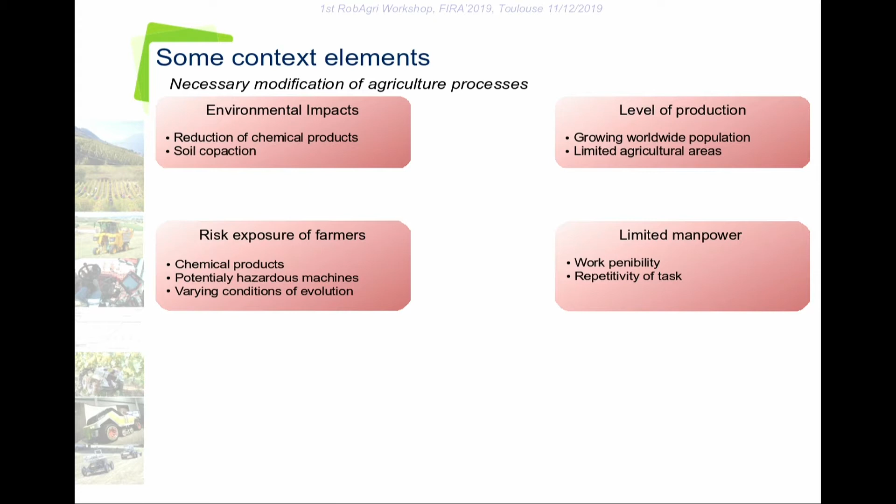So nowadays we have talked a lot in this FIRA, International Forum of Robotic Agriculture, about the benefits of robotics to face problems with respect to the evolution of agriculture, the environmental impact, the preservation of the level of production, the risk exposure of farmers, and the fact that we have a lot of penibility in achieving agricultural works. Robotics can help in having new principles for agriculture, such as precision agriculture, agroecology, or biological agriculture, since each of these solutions requires more manpower and more accuracy.

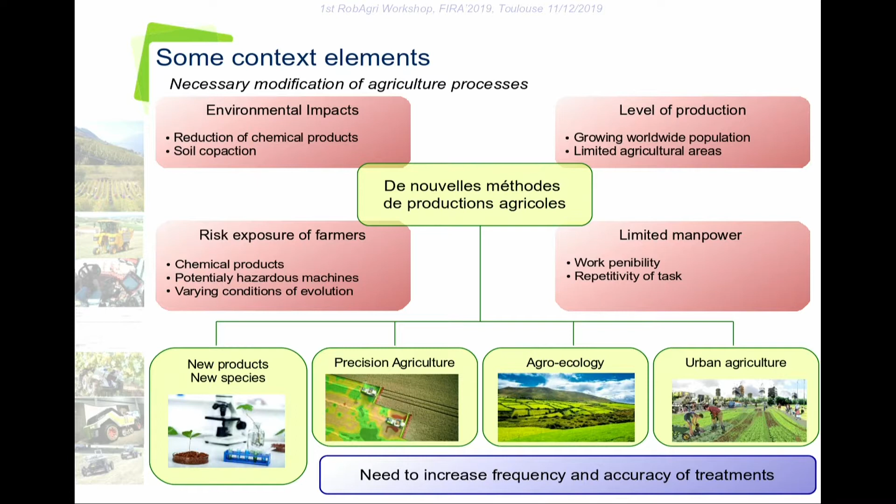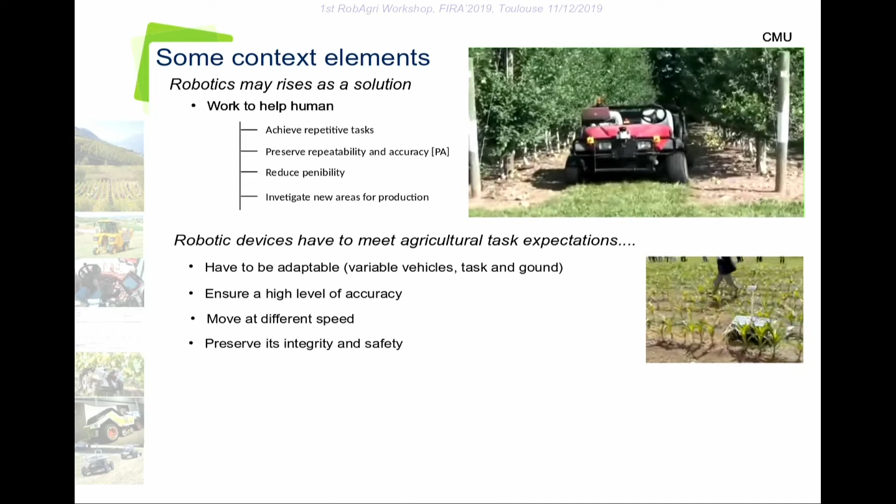But robots are here to help humans in working in agriculture, but they can also be used to find new concepts for agriculture. So instead of having big machines, we can have small robots who have the time to do a very precise job and act at the plant level.

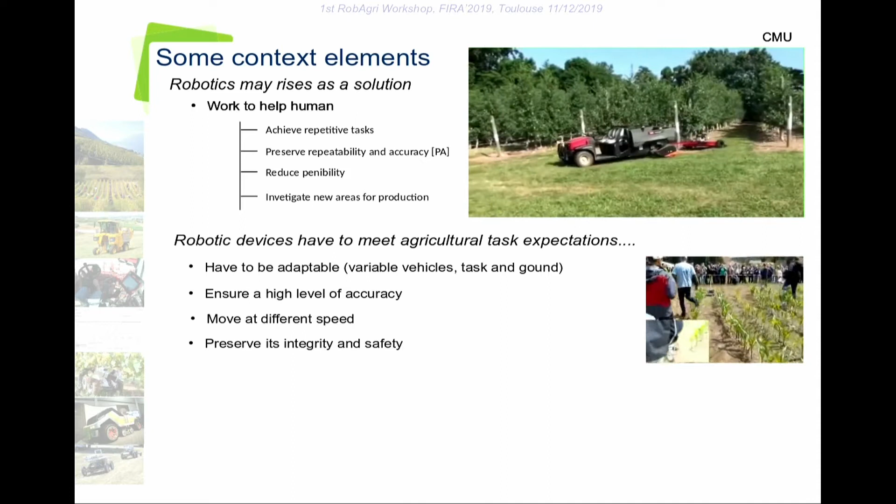Unfortunately, if we have some connection with the field of autonomous vehicles, we have some differences, because autonomous vehicles are moving into known environments. We have some structure, we have some prerequisites, we have some knowledge about the potentiality of parameters and interactions. And also the only task in transportation systems is to move from one point to another, even if we transport goods or people.

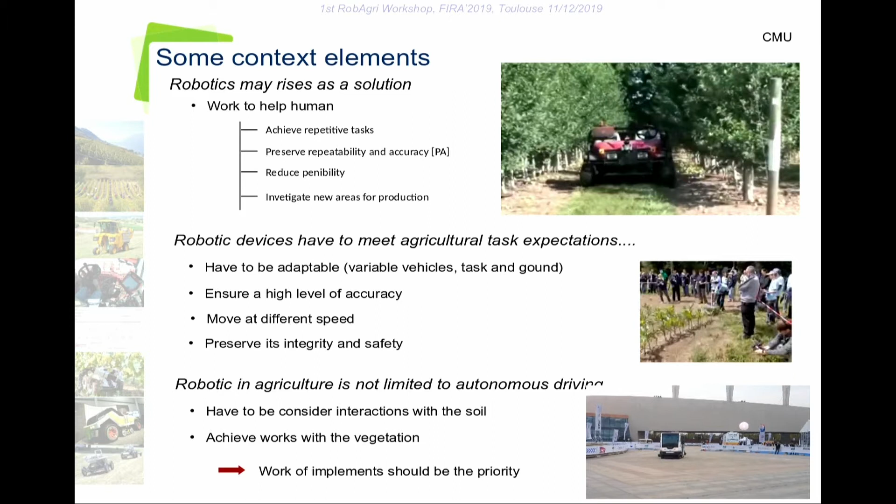But in agriculture fields, the idea is that we are making something on the earth and on the vegetation, and then we have to develop implements. What is important in agriculture is the interaction with the vegetation and with the earth. And so nowadays, what is done in such fields of application is...

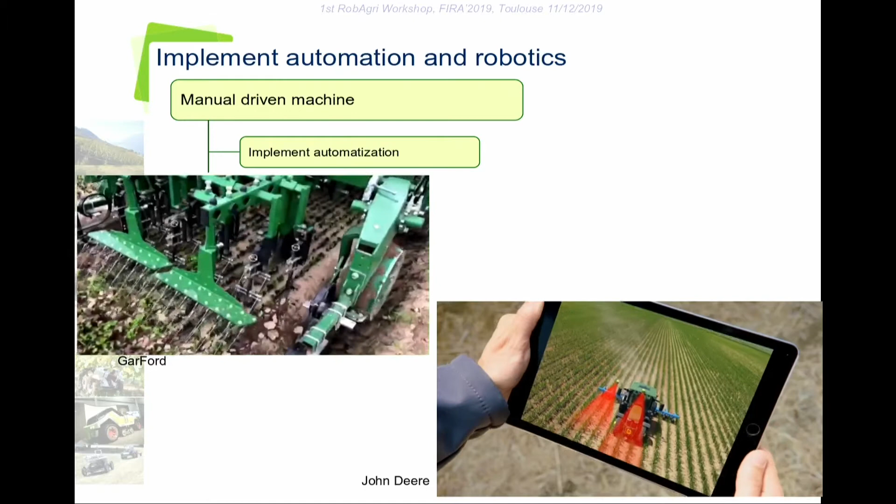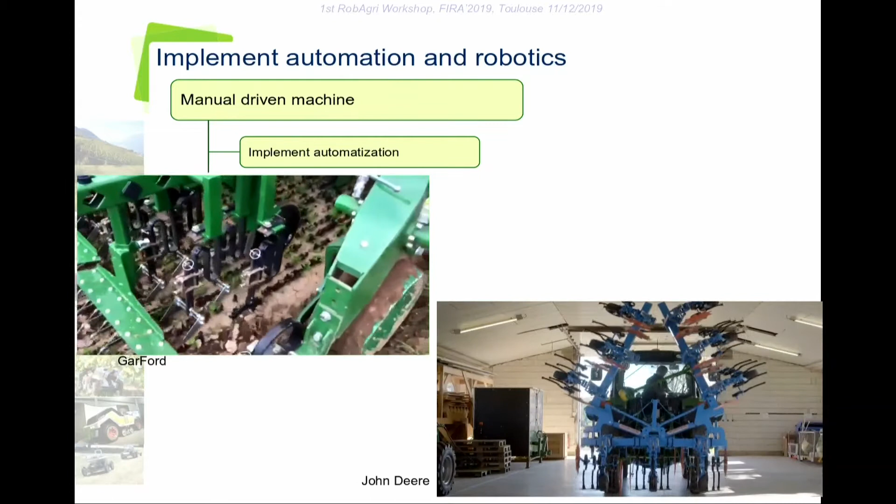First, we have activated implements, which are tools mounted on manually controlled machines, such as Garford, or some proposals from John Deere. In both cases, we have a conventional tractor which is moving thanks to the farmer or operator, and the implement adapts with respect to what the farmer is doing.

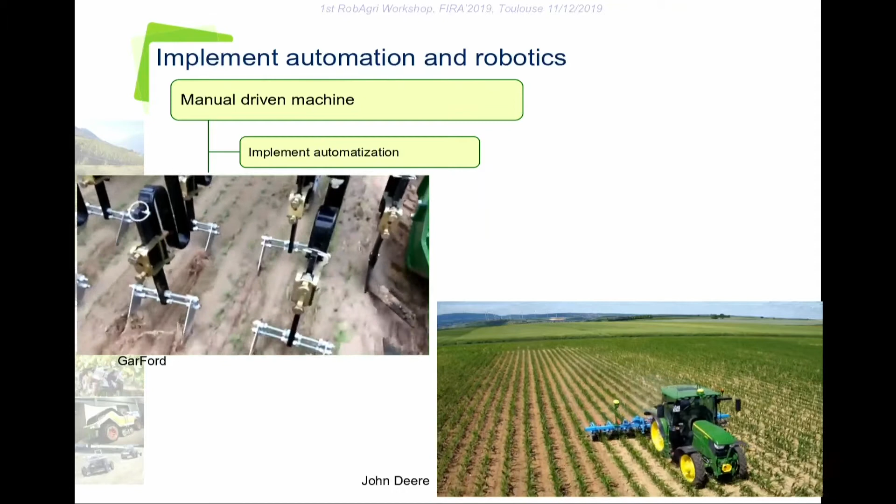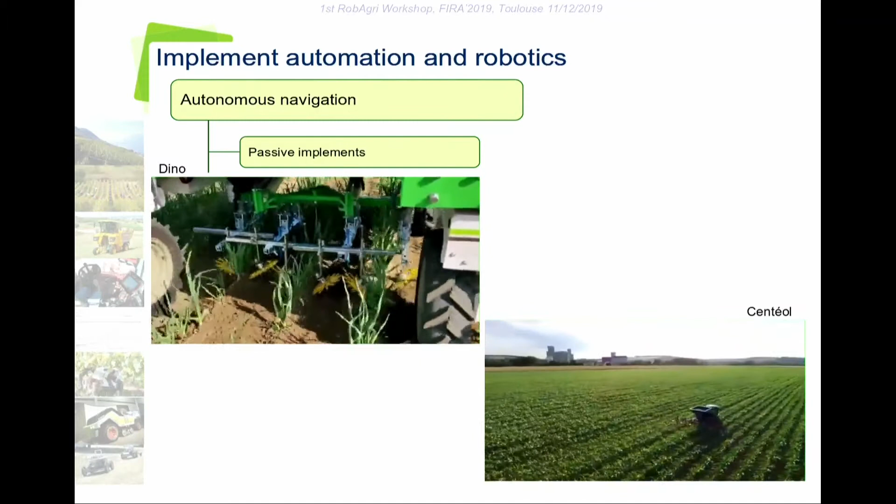The second way is we have robots, but we have passive implements. So robots can move autonomously, and it tries to position itself the best with respect to the vegetation, but the implement, the tool, is passive, so you just transport it.

We also have both active implements and active mobile platforms, autonomous mobile platforms. It's the case for Ecorobotix, which is a moving robot, and while it is moving, the implement is doing things, because for Ecorobotix we have manipulator arms, parallel manipulator arms, not with cables, such as we have seen in previous sessions.

Or the case of PumAgri, a project with moving robots, moving platforms, nowadays called Trektor. You can see it, it's manufactured now by SITIA, and this is a prototype in the PumAgri project.

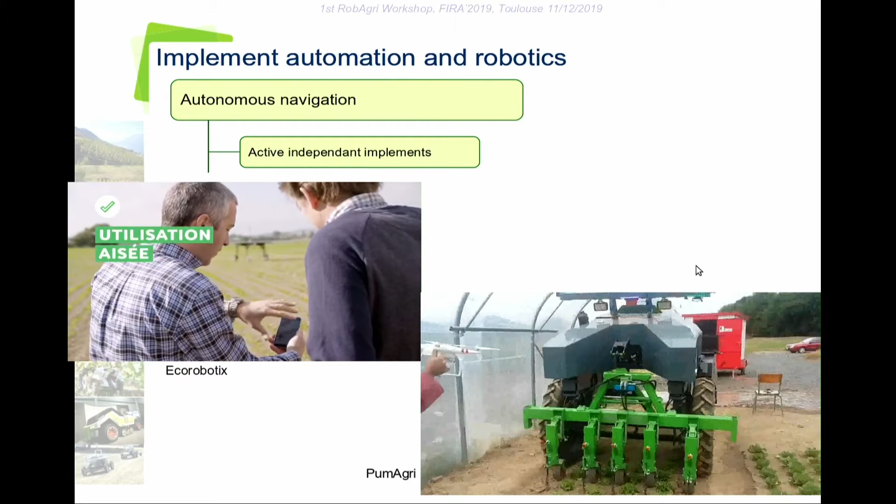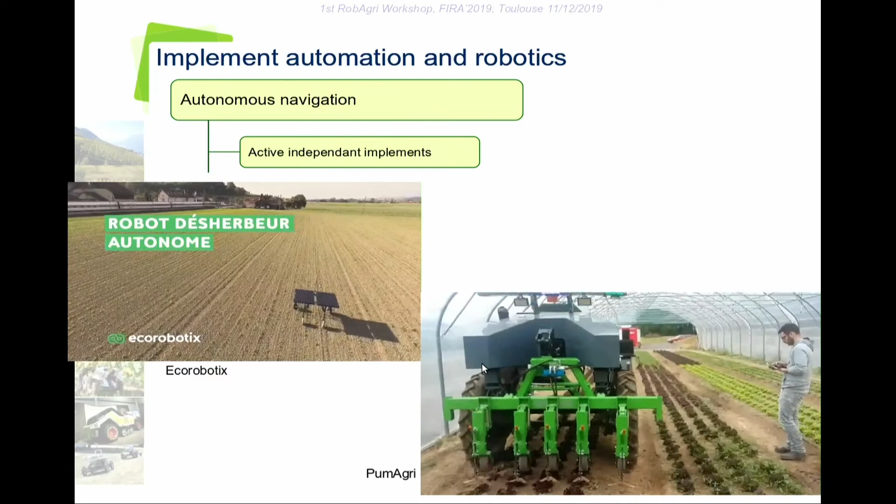And we have also an active implement. But in both cases, the motion of the robot is not linked to the motion of the implement. There is no connection, no synchronization between the fact that the robot moves and the fact that the implement moves.

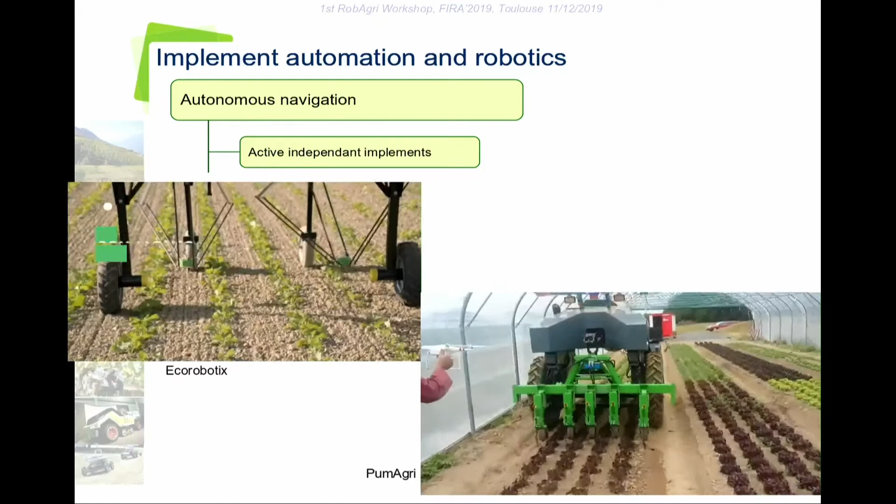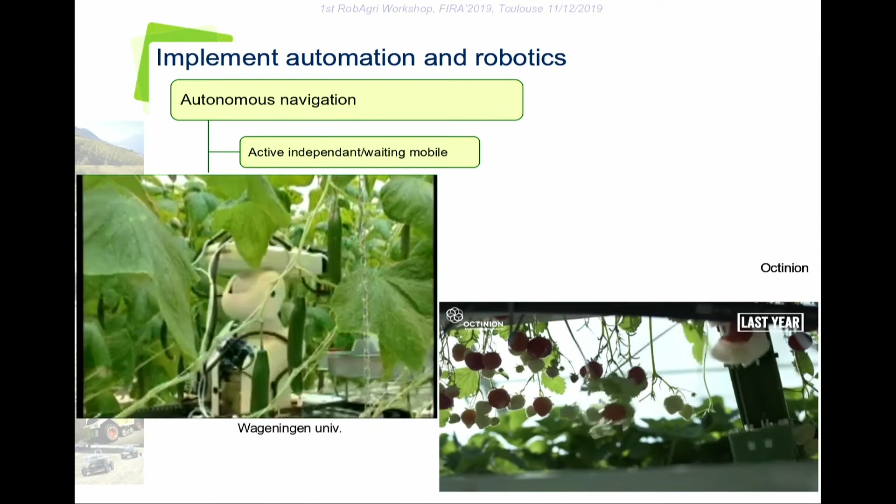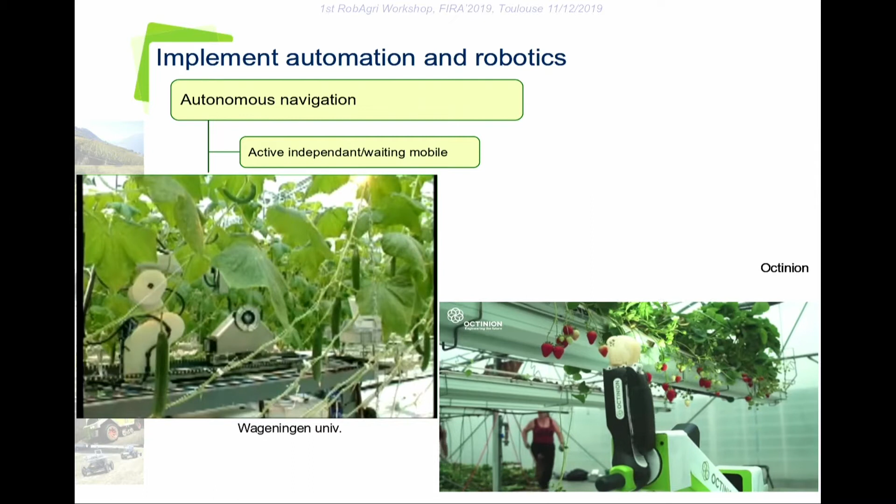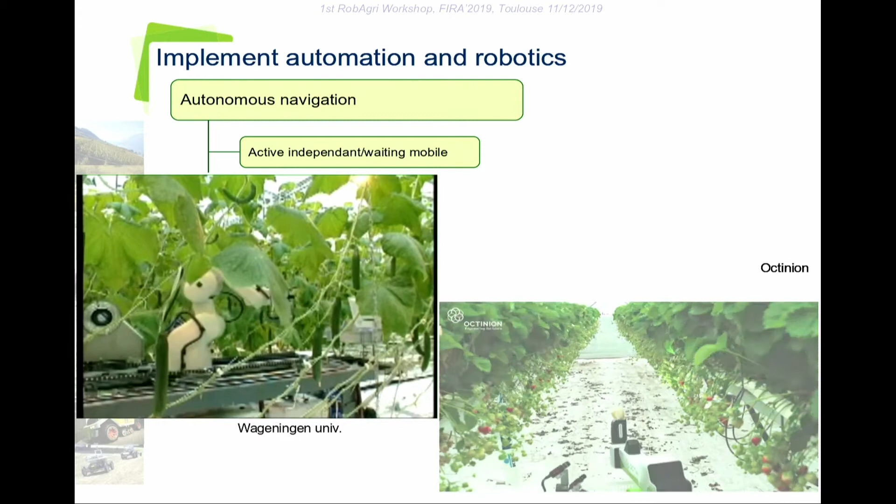So, no synchronization. The last point of view is that you have a mobile platform that can move and detect something interesting and just stop, and then you have implements doing things, such as in the Wageningen University or Octinion projects, where the robot moves from one meter to one meter, stops, and independently the robotic arm or implement does something interesting or makes contact with the vegetation. But there is no real synchronization between the mobile platform and the automated implement.

And maybe what will be important in the future is if we want to act directly on the vegetation or with respect to the earth.

Since we have deformable objects, maybe when we try to move the implement or the arm, we will be short in terms of workspace of the arm, and then we will have to move the mobile platform. And if we want to make further work, or make faster work, maybe we will have to drive the control of both an implement and a mobile platform with respect to the job to be done on the vegetation or on the Earth. But it's not so easy.

It's not because you have a mobile platform and an articulated manipulator arm that you have a mobile manipulator, but you see that the connection is not so direct, because there is redundancy. When you want to move from one point to another, you can move the arm, or you can move the mobile platform, or you can move both.

So how to do the synchronization, the management of redundancy - we have a lot of work in the literature on this robotics problem, which is partially solved in some environments when everything is okay without perturbation, but it's not totally resolved when we are moving in natural environments, or when we are considering that we are working with deformable objects.

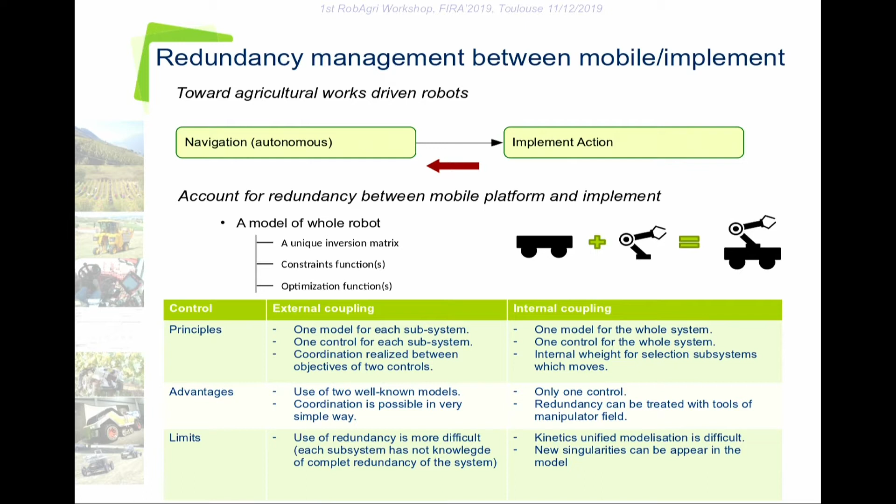So what can be proposed is to use backstepping approaches. We can try to develop several controllers acting in parallel. So for each kind of task - I want to take an object, I want to follow a trajectory - we can develop different controllers. If you want to reach an object, you can tell the arm, try to reach the object, and tell the mobile platform, try to reach this position. Both have the same objective, but they do not achieve it the same way.

So one possibility is to work step by step. You tell the implement it has to grasp this object. If the arm can do it, it's perfect. If it cannot, then you will meet some constraints. And if constraints appear, you say, okay, stop the motion or reduce your motion, and make the mobile platform move. Then if there are new constraints on the mobile platform, you tell it it can't move anymore, and it's the time for the arm to move.

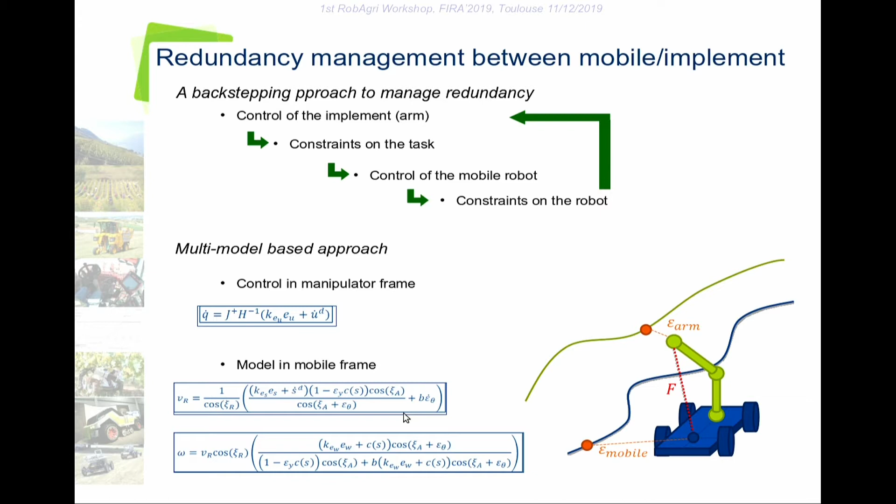So we can make a competition of several control laws. One control law - I won't go too deep into detail, don't be afraid, it's maybe the only equations you will see - a control with respect to the arm, a control with respect to the mobile platform, and then a weighting function which permits to optimize some of the constraints that can appear in the task.

So one of the main constraints which appears when you try to interact with vegetation, for instance, is the workspace of the arm. You know that a manipulator robot, your arm, if it doesn't move its feet, has a limited workspace - I can't go further than this. So when you try to grasp an object, if it is within the workspace, everything is okay.

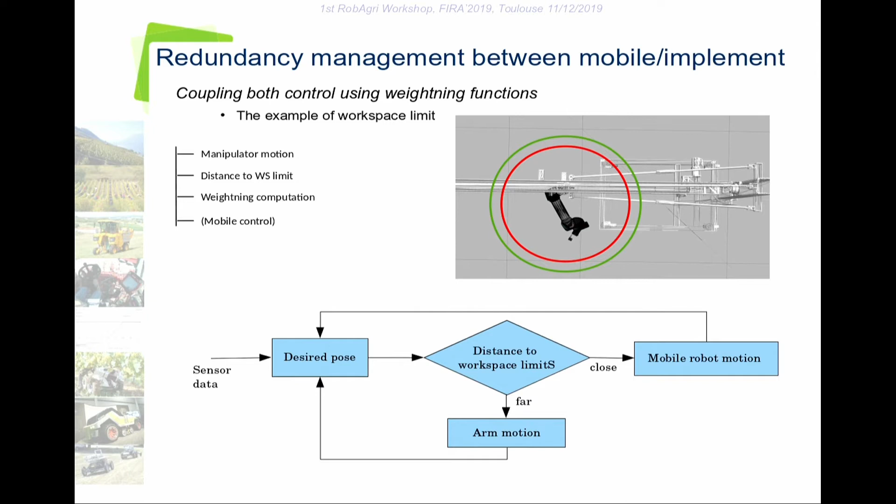But if you go through the limit of the workspace, which also depends on the elevation, you will say, okay, I can't do anything more, so I will define a weighting function which will permit to switch, or to have a weighting, a ponderation, between the elementary control of the arm and the elementary control of the mobile manipulator. We have applied that for this kind of operation, in the PhenoFold project.

So the idea is to make autonomous phenotyping of plants in the field. One elementary behavior is to make the convergence of the camera, which is mounted on the end effector of the manipulator, to take pictures on the green box.

It's just an academic example because you don't move the plants while taking pictures, of course. But it's just to see that when I am moving the green box, the arm starts to take pictures of it, so as to have a relative position with respect to the green box.

And if it doesn't succeed in taking the pictures because you are close to the limit of the workspace, the mobile platform starts to move. So you can imagine that this degree of freedom here can only be a mobile robot, the trajectory of which can be chosen.

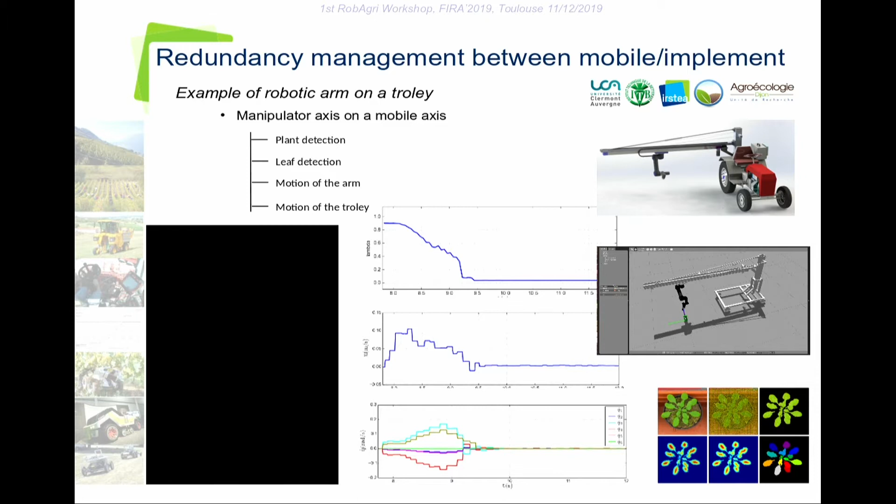And then we can make an iterative process. On these pictures, you see that with the camera we detect the leaves. As we detect leaves, we take pictures of leaves.

When we have taken pictures of leaves of plants, we go to the next plant, and we can see it by the camera. The arm tries to reach the leaves. It touches the limit of the workspace, and then the control of the trolley.

This part will take the power, and we will move this part.

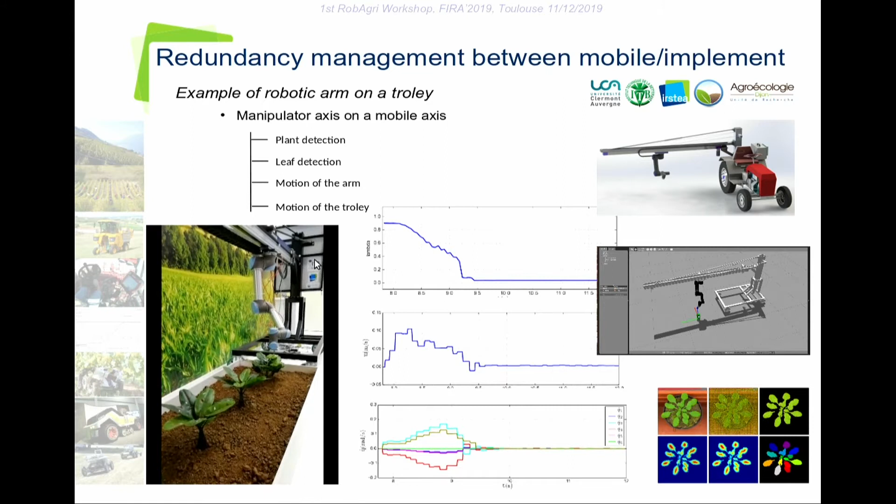Okay, and this is just an example, and we can generalize this point of view and this backstepping approach to a mobile manipulator in order to follow a trajectory or to make posture manipulations. So we have here the coordination between the robotic arm, which tries to follow its trajectory and succeeds in following its trajectory, while...

...the second part of the control, which is the mobile base, is able also to reach the trajectory. It works with skid steering robots, such as this one.

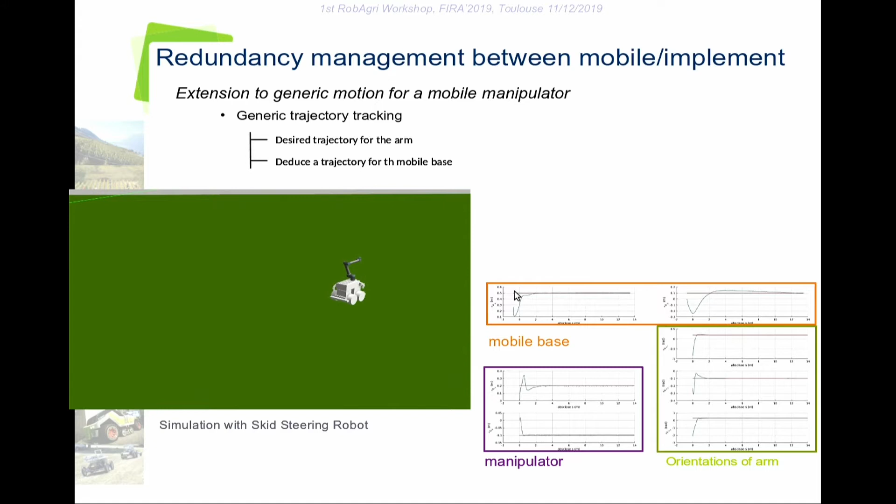For the moment it's theoretical. It works with four-wheel steering robots, so not only Ackermann, but double Ackermann robots where front and rear axles are activated. And then we can extend the backstepping approach to coordinate the position and orientation of the manipulator arm.

The position of the mobile robot with respect to the trajectory, and also the orientation, because we have four-wheel steering on the robot, the orientation with respect to the trajectory we want to follow.

And then we have beautiful convergence, despite some perturbations, for the mobile base to the good position and orientation, and also for the manipulator to the good position and the good orientation. So we are quite happy with that.

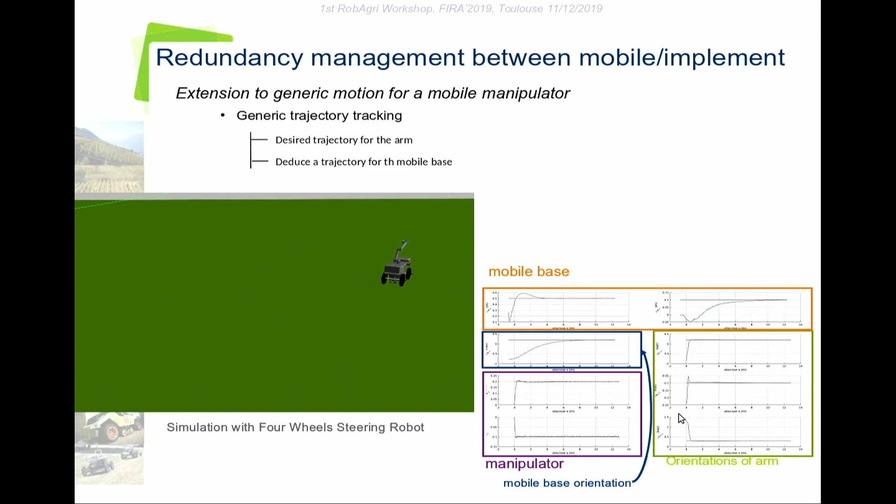An interesting thing is that above the workspace limitations, you can add some other constraints, such as the occupancy grid, and say, okay, I want my manipulator to follow the trajectory up there. But the mobile platform can do another trajectory, since we may need to avoid obstacles.

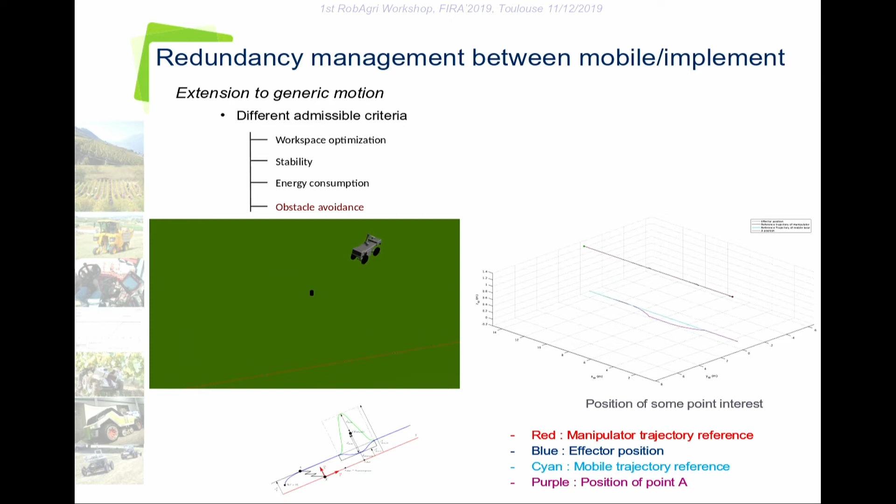But we can avoid obstacles while preserving the position and orientation of the mobile manipulator, and then we can manage the redundancy of the degrees of freedom in order to have the position of the arm and the position of the mobile robot. This backstepping approach is quite interesting to have an actuated implement, but we can extend it...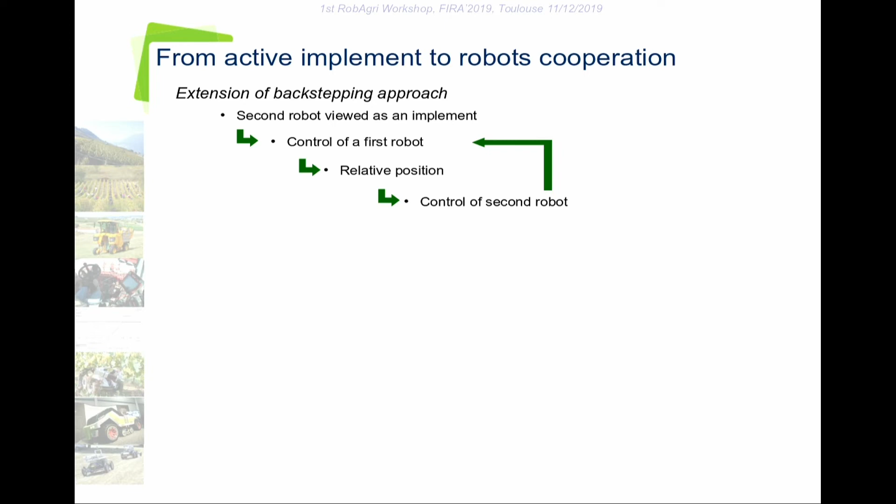...also to consider that an activated implement can be a manipulator arm, but can also be a second robot. And then we can use this backstepping approach to control the position and orientation of a first robot.

As soon as we get the relative positions, we can make the regulation of the second robot with respect to the first one. And then we have a kind of activated tool which relies on the first robot.

So we have used that in the Adap2E project. The idea of this project is to say, okay, I can have a fleet of robots. Depending on the task I have to do, I can use only one robot to do monitoring, field monitoring. But if I have to hold heavy loads, I can use two robots, or if I want to make complex applications, I can share a unique implement with several robots.

The objective in terms of applications was to make spraying, so confined spraying. So with one spraying tool on one robot, and the second spraying tool on the second robot, and recuperation bags, in order to cover trees, cover the vegetation, to avoid dissemination of chemical products in the atmosphere.

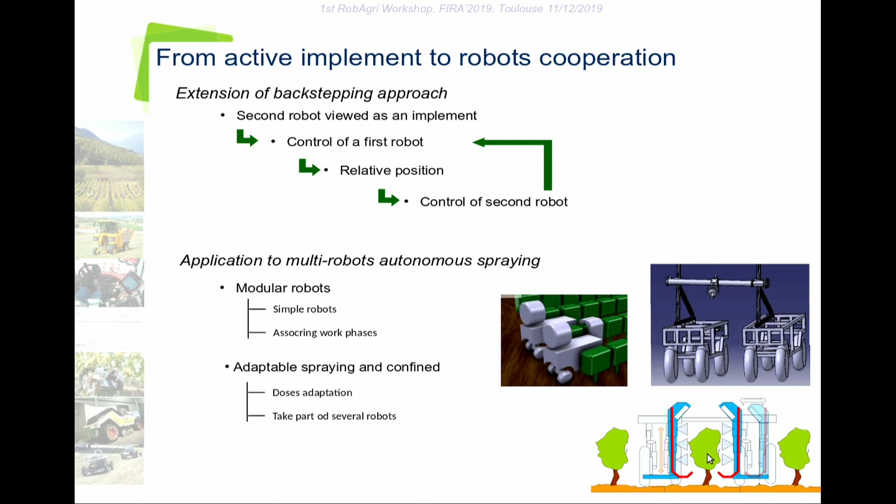Okay, so let's start with the first robot, as we are trying to have a regulation with respect to the vegetation. We use LiDAR, which is positioned on the front of the robot. We detect some points, and we group the points with respect to objects. So we consider that we have objects depending on the capability of the robot, that means the wheelbase and the width of the robot. And then we assume to have groups of points. As soon as we have groups of points, we look at if it's possible to go through the hole.

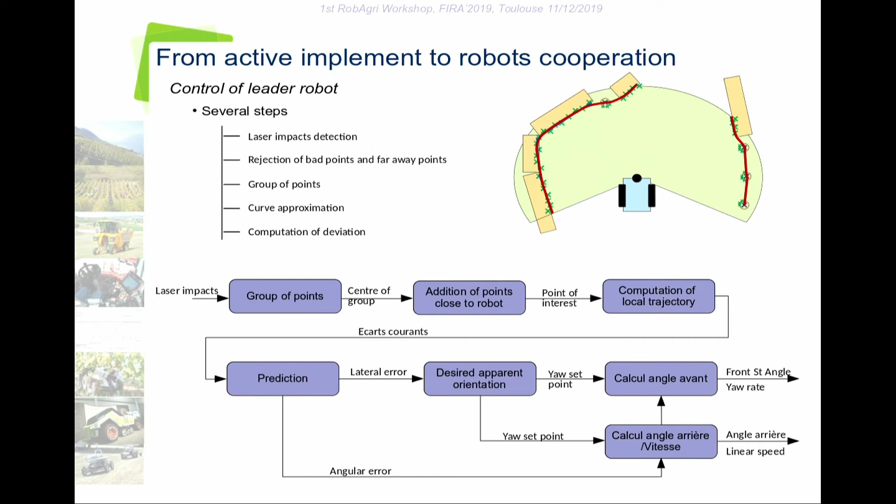So for instance, here we cannot pass, so we consider that we will have only one trajectory. And then we define one trajectory on the left, one trajectory on the right. If we have only on the left, we are happy, only on the right, we are happy. If we have both, we are less happy because we have to make a choice or a mean in between. But anyway, we can move this way.

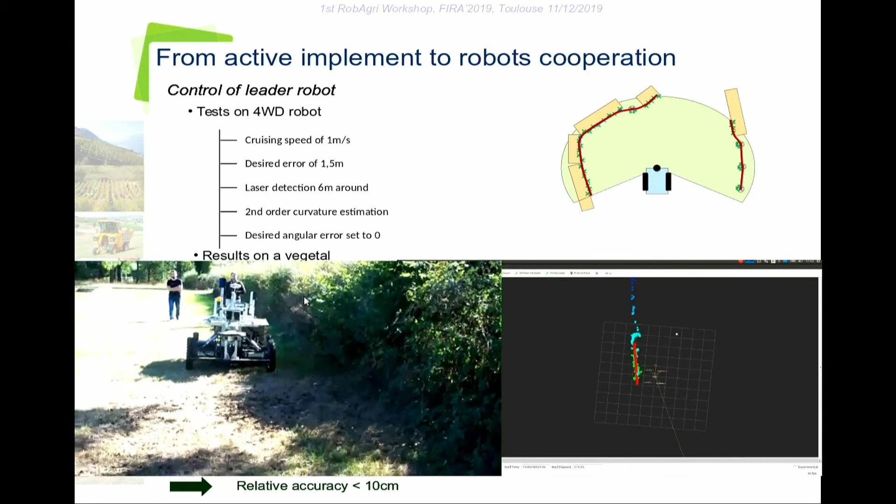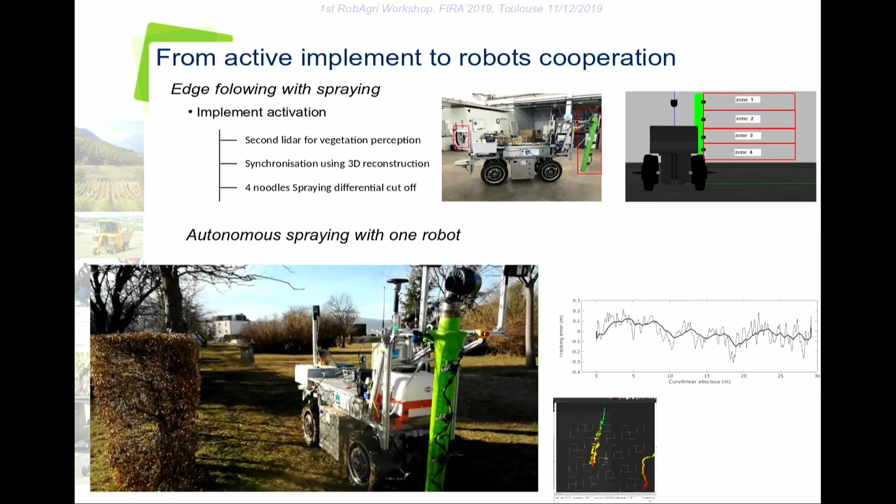We can make the control of the front steering angle, such as before, the control of the rear steering angle, and we can control independently the relative position with respect to the vegetation and the orientation. Okay. So as we have LiDAR, we can also use the LiDAR to detect if there is a hole in the vegetation and to adapt the spraying with respect to the presence or absence of vegetation, and we can cut some of the nozzles depending on the presence of the vegetation.

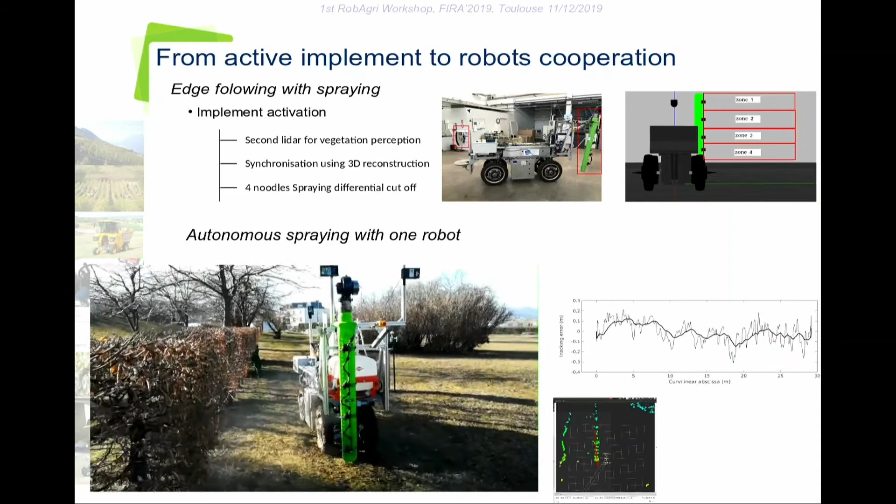So we have a robot which is able to move, and now we will try to add a second one in order to make more complex tasks. To do that, we consider that the first robot moves and is oriented. We can define in the frame of the leader the longitudinal distance, lateral distance, relative orientation, and then the objective of the control is to find steering angles and velocity which permit to regulate the position and orientation of this robot with respect to that one. But in order to do that, we need a local sensor which gives this position and orientation.

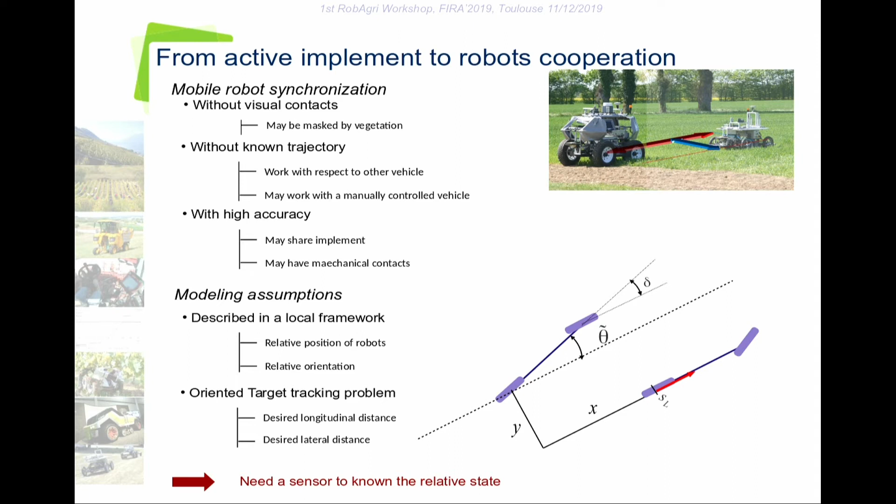We can't use GPS because we are close to the vegetation. We can't use LiDAR because possibly the two robots are on both sides of the vegetation, so we can't see each other. We can't use vision either, so we have used radio frequency, an ultra-wideband sensor. An ultra-wideband sensor is a radio beacon which can be in relationship with other beacons, and knowing the signals, we are able to define a distance between two beacons, and we have a network of beacons.

So here we have put beacons. We know the position of each beacon. We have put two beacons on these Pumagri robots. So we know the distance between the beacons and the robots, and then we can make localization. We have tried outdoors because we would like to compare with the GPS, and we have almost a perfect correlation between GPS signals and UWB signals.

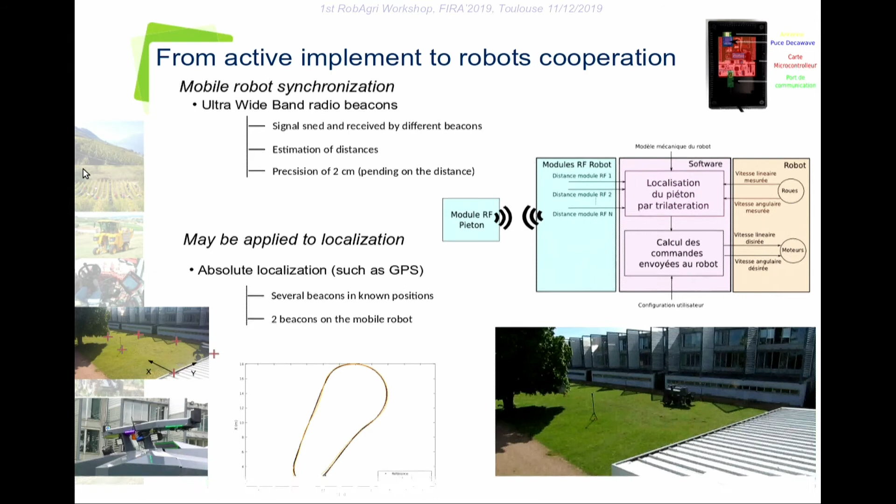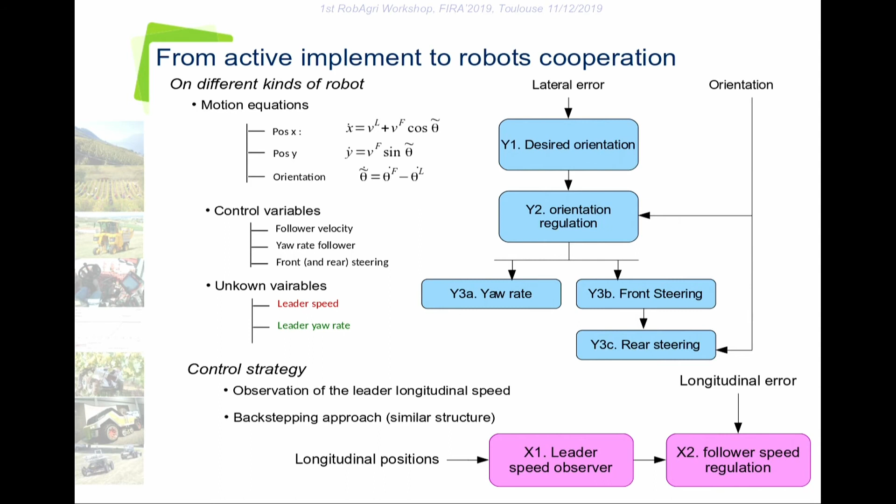So using this material, we can put 2 beacons on the leader robot, 2 beacons on the follower, making a backstepping approach to regulate the desired orientation, to regulate front steering angle and rear steering angle. We can do the same from the longitudinal point of view. We assume that we can decouple the longitudinal and lateral servoing. And then we are able to have a virtual link between robots.

So the first robot is automatically controlled with respect to the vegetation with the first LiDAR. It can detect the vegetation with this one. It can adapt the nozzles and the spraying. And the second one does not have the sprayer yet, but it will come soon.

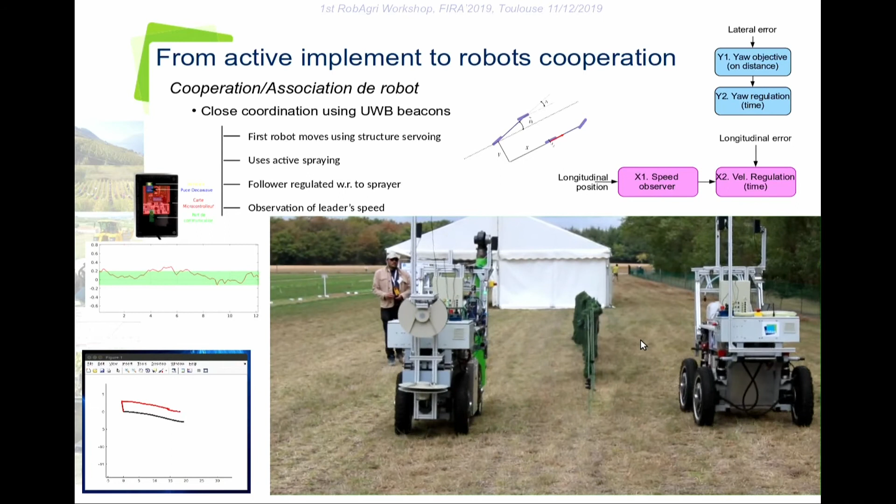So sorry. That's why I wouldn't like to present it today, because we are not totally operational, but it's quite interesting too.

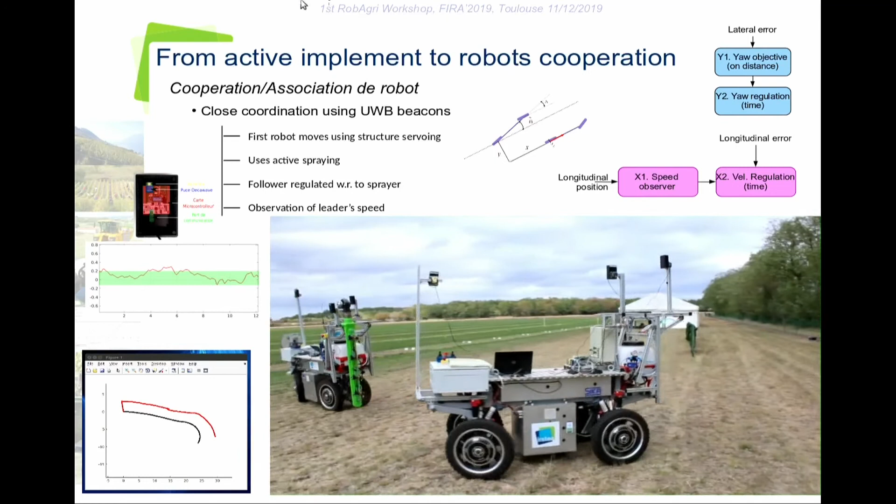And then at the end, the first robot can follow a trajectory using a GPS, or in this case, it is manually controlled with the remote controller there, and we can select to stay on both sides, or we can say, okay, you can go behind me in order to make some operation.

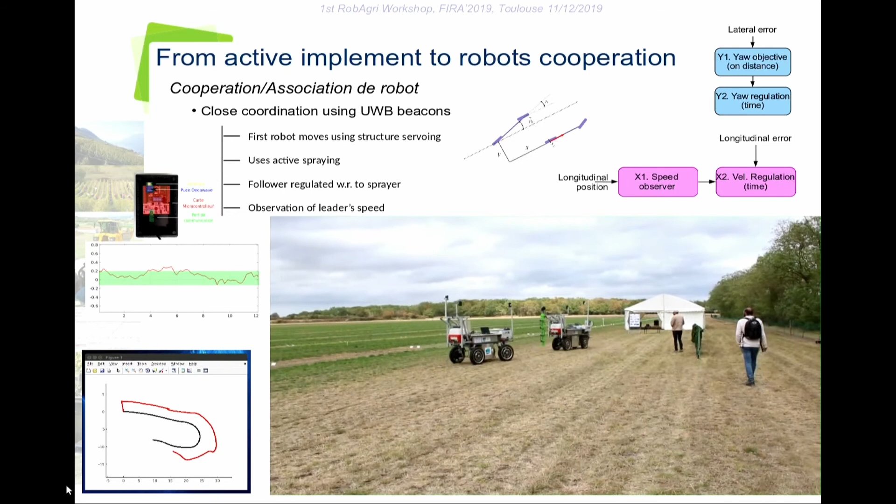Okay. So we succeed in having some good results, especially in the lateral servoing. Here, during these phases, we ask to have 3 meters of lateral deviation between both robots to be at each part of the vegetation. And we are succeeding in staying at 3 meters plus or minus 10 centimeters. And it's about the same in steady state with respect to the longitudinal distance.

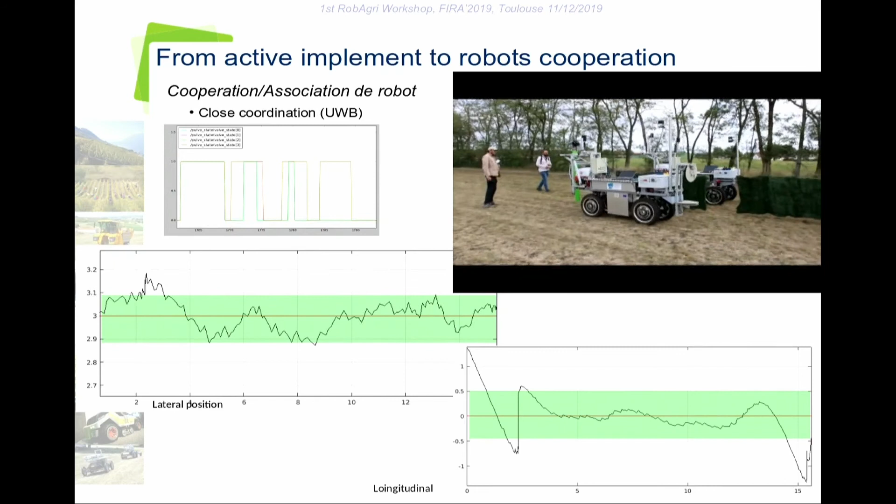We see that we have some deviation there and there because we arrived in stopping phases of the first one. So when you have fast variations of the first robot, you can't manage to always have good precision. We expect to compensate that using predictive approaches, such as you've seen with Mohamed.

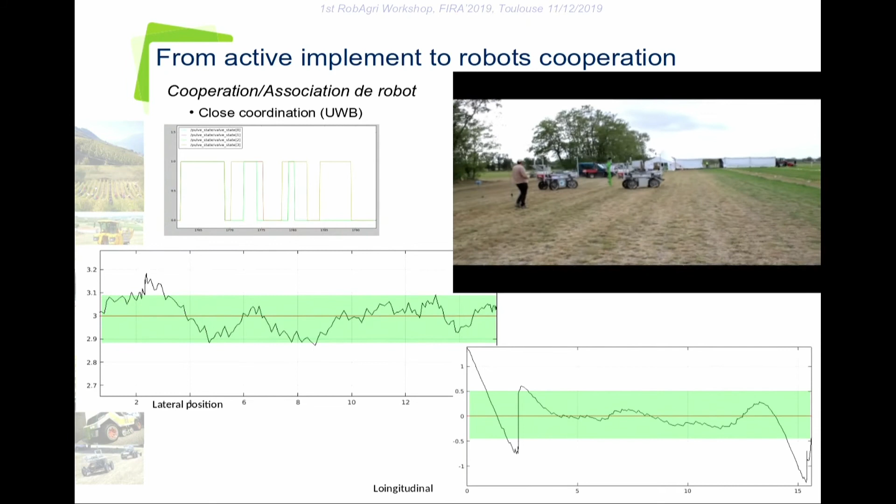One thing which can help is also to have communication between robots. For the moment, there is no communication, they just have the relative position and orientation. One interesting thing is if we can use the radio connection also to give some information from the leader to the follower, such as I will stop, my velocity, or the expected velocity if I am automatically controlled.

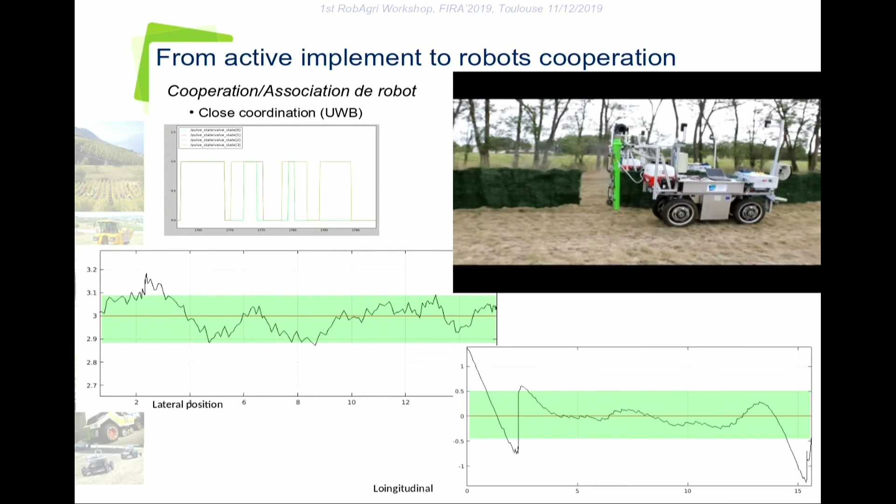I know that I will slow down. I know that I will accelerate. I know that I will turn right, turn left, and so on. And so using that, I can have better synchronization.

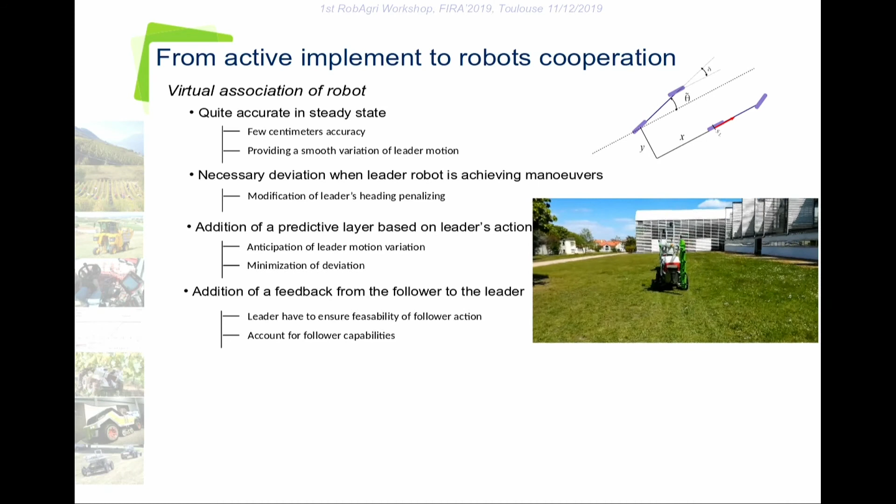So what is interesting today is to say that using robots in agriculture is not only autonomous navigation, it's also the control of an implement. We have to do the synchronization of automated implement and autonomous navigation. It's not so easy because there is redundancy and there are a lot of constraints we have to take into account.

And to go further, we can use a second robot or several robots in order to have virtual tools and to enhance the implement capabilities of the robots, and adapt also the number of robots, the resources we need, with respect to the task to be done or the capability we need.

For instance, one of the objectives in the future is to arrive at a mechanical connection between robots. So if you have to go on a high slope, instead of having a very large machine which is able to change the position of the center of gravity or the orientation, you can say, okay, instead of using one robot, I use two robots. The second one will help the first one to stay within the slope without turning around.

So we believe in that, and we consider that beyond the control of active implements, we will have to move to the control of cooperative robots to have an adaptable robotic system with respect to agriculture.

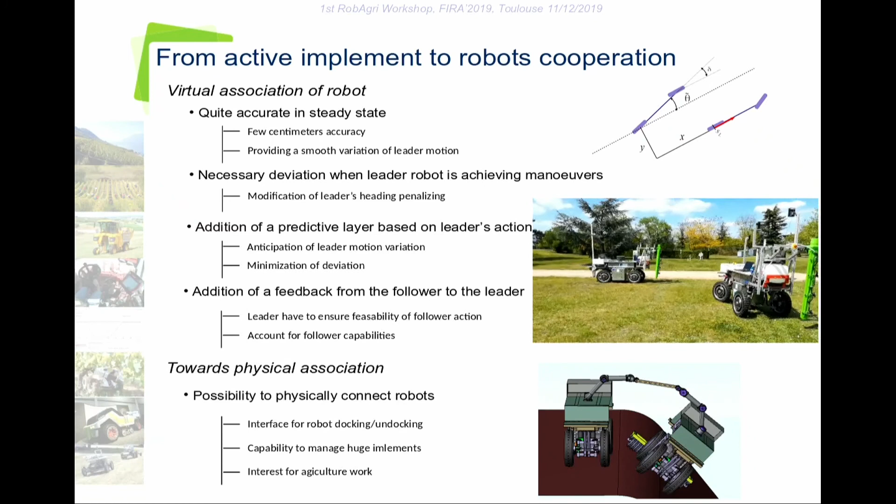There is no certification of that. The second problem is that between the beacons, it's better to avoid using steel or iron because radio cannot go through properly, and it changes the accuracy. It's interesting for the vegetation because the radio signal is not affected by the vegetation, but it's affected by going through iron or steel or something like that. But I don't know if today there is a UWB technology which has been certified and can be used.